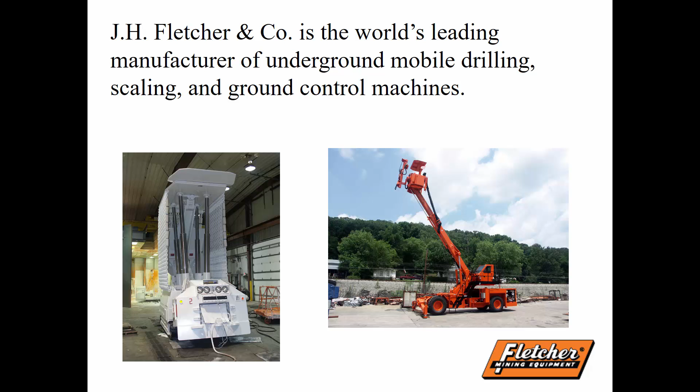This here is a mobile roof support. Basically what it does is it holds up the roof while a continuous miner goes in, cuts out the coal, then it retracts out, and the mine collapses behind it. So it's meant to hold up the roof while you dig out your supports.

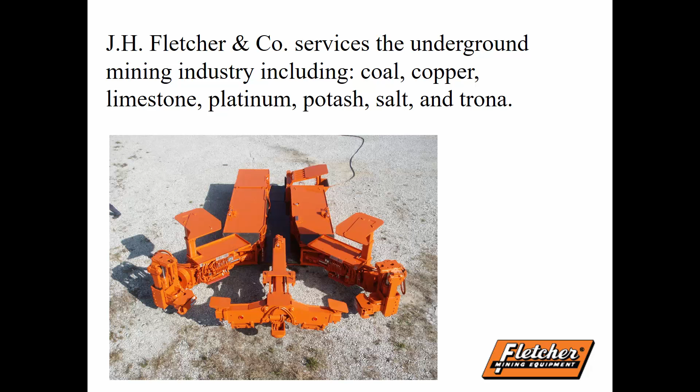This is our standard HDDR machine. If you walked through our plant about 5 years ago, about 80% of the machines you saw in there would be this machine. Like I said, we service all types of mines. We custom design everything, so every mine you go into is different, and almost every machine you see coming out of Fletcher will have something a little bit different about it.

So we design roof bolters, scalers, face drills, ANFO loaders, beam handlers, can stackers, long hole drills, mobile roof supports, and diesel tow vehicles. And that's just another HDDR over there with the guys working underground.

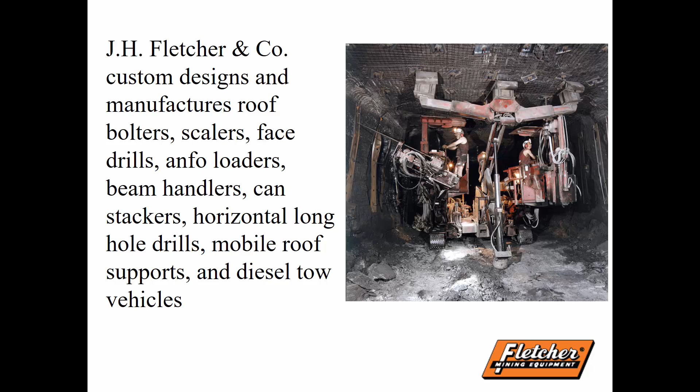Some 100 to 120 million bolts are installed in the U.S. every year, and Fletcher machines install over 90% of these bolts. That number is probably a little less right now with the coal market being down the way it is, but still the majority of the machines in the United States putting in bolts are Fletcher machines.

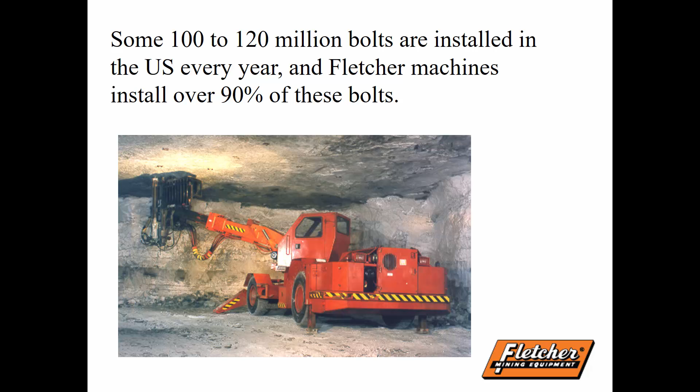This machine here is actually a remote drill, so instead of having a man up, it's all done remotely. It drills a hole, picks up a bolt, and puts in a bolt. It's actually a rather difficult problem to work on.

I'm just going to kind of go over my responsibilities at Fletcher, what I do on a regular basis. The main number one thing is design machines to meet customer specifications. So salesmen and engineers will meet with the customers and develop specs for their specific applications.

We'll write a production order. When that production order is written, it's sent to the engineers and we design the machines to that production order. A lot of things go into the design of the machine, like stress analysis of your critical structures, so booms, canopies, and TRS, which is temporary roof support.

We actually hold up the roof while we're drilling, and then after we put in the bolts, we can bring down the temporary roof support. There's also sizing of bearings and pins, hydraulic cylinder sizing, so bores and rods based on your forces, and stroke lengths required to achieve the required motion.

I work a little bit on the design of hydraulic systems, though I don't do a whole lot of that. Preparing engineering drawings is a big part of what you do — after you design it, you have to put it on a drawing so somebody can manufacture it. And then we always provide engineering support during assembly.

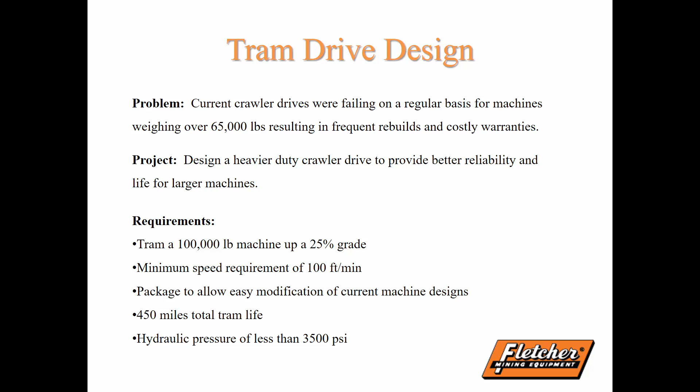So we want 450 miles total tram life, and hydraulic pressure of less than 3,500 psi.

So first you go through the engineering process. You develop the requirements, as I showed earlier. You lay out a possible solution to the problem, then you analyze that solution to see if it actually meets the requirements. Then you just iterate — start all over. You come up with a solution, see if it solves your problem, and if not you start over, or build on your previous solution.

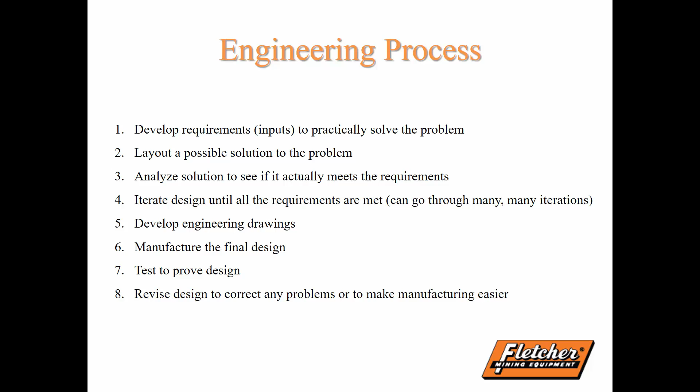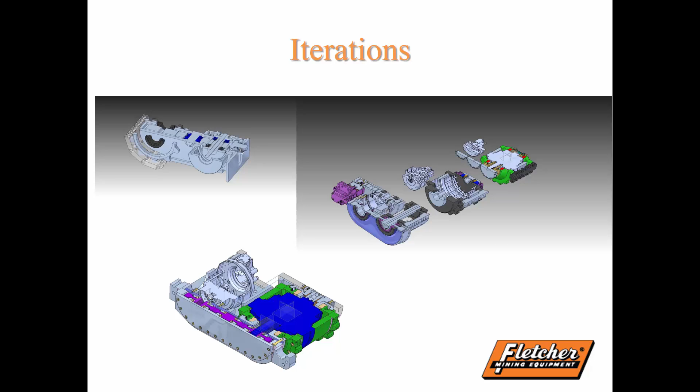After you've done that and met all your requirements, you develop the engineering drawing, then move on to manufacture, test, and revise the design to correct any problems or to make manufacturing easier — that kind of stuff. Here you can see several iterations that I've gone through on this, with many hours spent on layouts, bearing analysis, gear analysis, and packaging. Finally you come to a final solution.

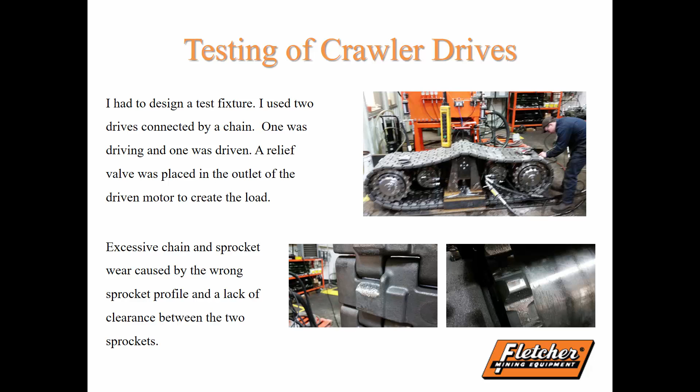We designed a test fixture using two drives connected by a chain — one driving and one driven. A relief valve was placed in the outlet of the driven motor to create the load, so you're actually back-driving these to create torque. Excessive chain and sprocket wear was caused by the wrong sprocket profile and a lack of clearance between the two sprockets. So just from this simple test we saw a problem, and we corrected it and moved on from there.

And then final implementation onto our machine. You can see the crawler down there — the drive is right in there. So it's on the machine, out working in the field. We have had some field failures, so part of my job is to figure out why they're failing and fix those failures.

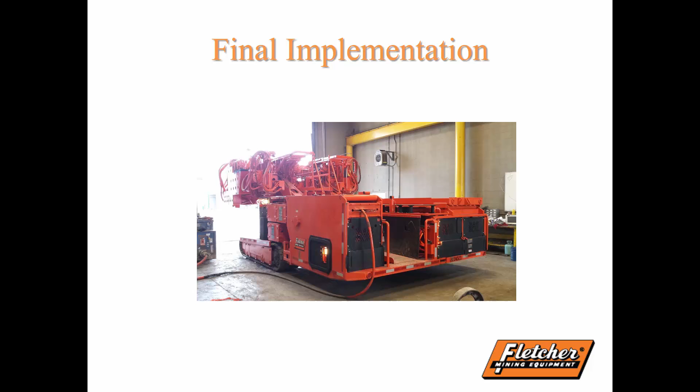The next thing, this is another big project that I had. I actually just got back from Africa working on this project Friday, so it's actually going really well. The problem was, the project was to develop a reliable production-ready roof bolter that allows the operators to remotely control the drilling stations. Typically a lot of our machines are man-up machines, and most of our remote machines are not in coal mines — but this is actually for a coal mine.

We haven't really done this before. We've done auto drills, but they're complicated, not very reliable, and difficult to work on. So we were asked to develop a simpler machine that was reliable, basically.

So it has the requirements where it has to use their bolts and resin, has to be able to meet the customer's bolting patterns while fitting the profile of their mine, be able to operate the machine from behind the last row of bolts, meet current production rates, and they needed a 16-bolt carousel.

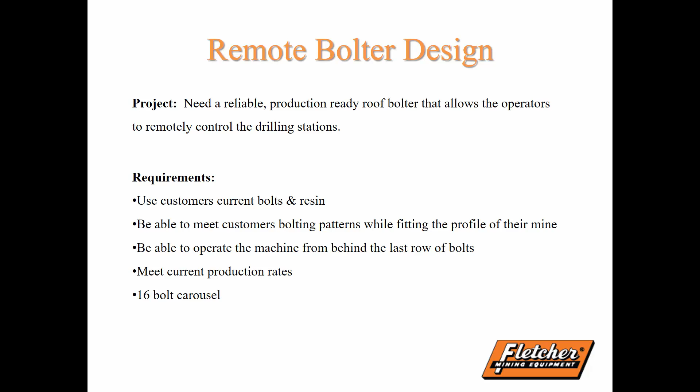So here you can see a CAD drawing, not completed, but of the machine. We went through several iterations to get to all of this design, and the majority of what I worked on were these booms and the module out here.

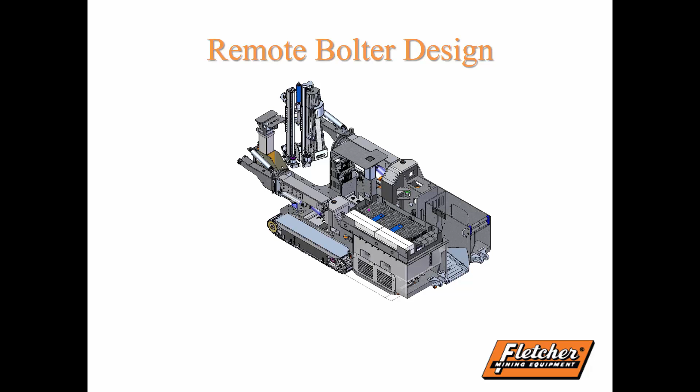So this right here, those are the bolts. You drill the hole with this one, and then this indexes around and it inserts the bolt into the roof. It's all done remotely from the control station here, and everything's hydraulically controlled.

So kind of what goes into that, like I said, boom design. You can do stress analysis on the structural components. You can see here this is an FEA analysis of the boom. So you have a load, you put it on your boom, you have your supports, and you see what stresses are in your material. Your material is rated for a certain stress, and you want a safety factor above that.

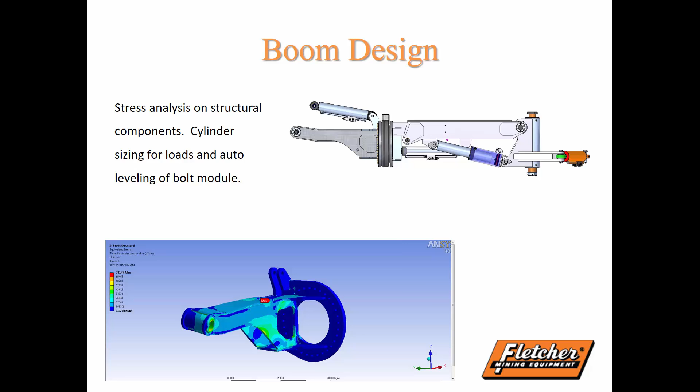You keep iterating your design until you are under that stress limit with an acceptable safety factor. Cylinder sizing for loads and auto leveling of the bolt module: as this cylinder extends, this other cylinder will extend at a relative rate, so as the bolt module goes up, it actually stays level. That involved figuring out that geometry and balancing areas of the cylinders, stuff like that.

And then moving on to the bolt module, this was less about structural design and more about mechanical component design. As you mechanical engineers get further along, you'll get into bearing analysis and gear analysis, so I had to do all that on this drive.

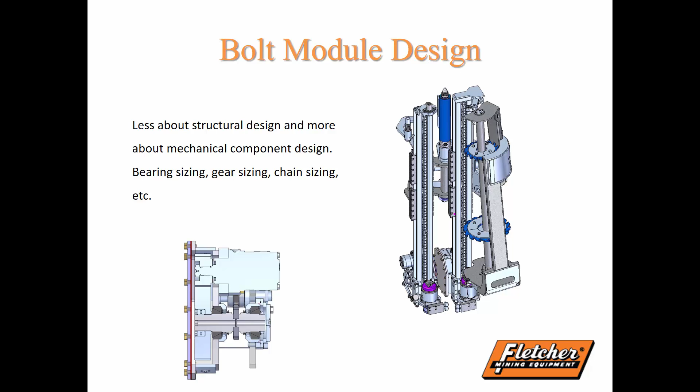So what this drive actually does is convey this chain up, which pulls this drill head up. As this thing rotates, it pulls it up, and that's how it drills into the roof. So a lot of bearing analysis, gear analysis, running through the numbers, knowing my load, then going back through and making sure everything's sized correctly.

So then you move on to assembly. Final assembly took place from November 2015 to March 2016. Much of my time was spent troubleshooting hydraulics and coming up with solutions to design problems.

This was the first time we'd ever built this machine, and the first time you ever build anything, there are going to be problems. So my job as an engineer is to figure out what those problems were. Was it a quality issue? Was it a design issue? Or some other kind of issue? Has it been assembled wrong, hosed wrong, something like that?

Once you figure out what the problem is, you have to figure out how to fix it. If it's a quality issue, can it be reworked? Can you weld on it, grind on it, can you make it work? Or do you have to reject it and order a new one? All those kinds of decisions are left up to the engineer, so that's my responsibility to go in and figure that out.

This machine, for a first machine, I was fairly happy—it didn't have too many problems. We had some hosing issues that took us a long time to figure out, but overall it went pretty well.

So like I said, this is actually the machine above ground in Africa. They're getting ready to tow it underground. I was there for 2 weeks, commissioning, helping train operators, making any final adjustments to the hydraulic system, and just basically monitoring the operations.

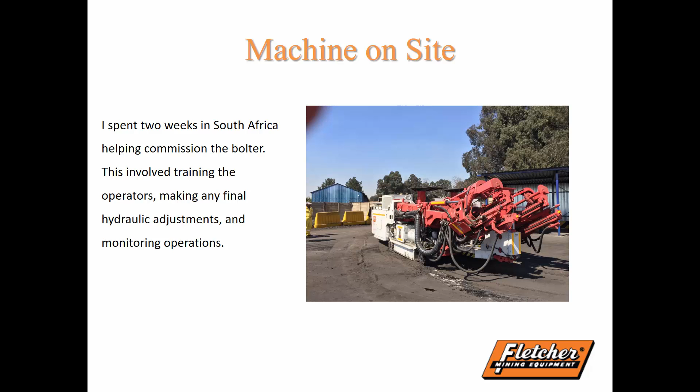So just my advice: the basic thing is study, go to class, seek help if needed. Don't just copy the solution manuals—I'm sure you guys already have all of them. Don't get discouraged, keep your engineering textbooks, and take advantage of networking opportunities while in college.

At the end of the day, your goal is to find a job once you graduate. So start early. Don't wait until your last semester of your senior year to try to find a job. It usually doesn't end well. Get work experience before you graduate.

I would say every single one of you should take this to heart. If you want a job right as soon as you graduate, do a co-op, do an internship. I've had friends that didn't, and it took them months to find a job, and a lot of times it wasn't a job they wanted.

So go to career fairs, find co-ops, internships. I highly recommend it. Apply to as many jobs as possible. Sometimes your first job isn't going to be your dream job, but at least it's a job.

Don't just rely on the university's employment resources. There's lots of resources online. Go out, find what you want, and apply for the jobs that you actually want. I know this is probably a little early for you guys, but just keep it in the back of your head for whenever you get to that point.

And don't be afraid to make mistakes. It happens. You just fix them after you do. Any questions? That's all I have.

How do they do the mining for you? Like what is your machine? So they have our machines in the mine. If you're talking like before, roof bolters have been around since the 50s. Before that, it was timber pillars, they would actually build timbers and place them up, and that's what would hold the roof. So safety in mining over the last 50 years has greatly improved.